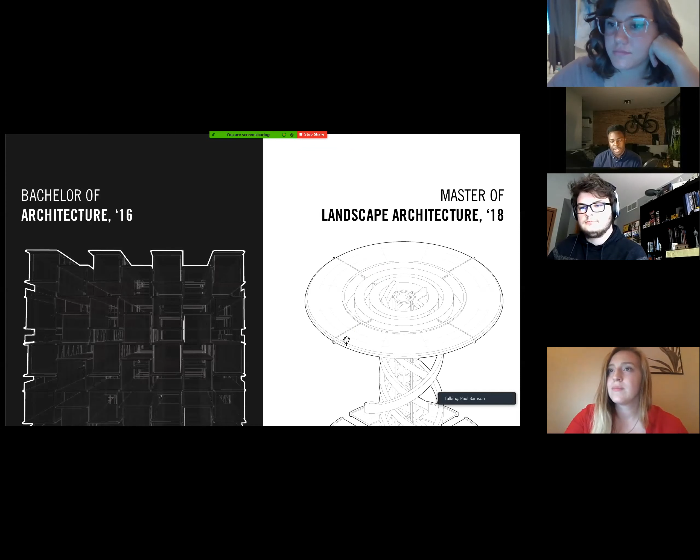I went to the University of Tennessee, where I got my Bachelor of Architecture and my Master's of Landscape Architecture. I really enjoyed the opportunity to go to UT because all three major design disciplines are in the same building: architecture, interior architecture, and landscape architecture. There's lots of cross-pollination in the studios, and that allowed me to branch out to look at landscape architecture.

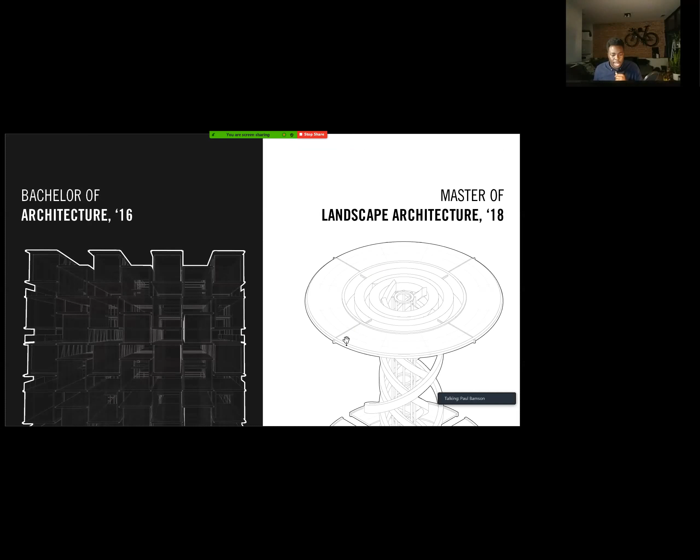I'll actually be showing some work in both of these fields. But back to who I am: Nigerians are very colorful people, both in the way we dress and in the way that we act. If you know any Nigerians, they're typically very flamboyant and loud people, but we're full of passion. One of my dreams is to go back to Nigeria in some way, form, or fashion and make an impact there.

I grew up here, and my first time back in Nigeria was actually in 2018, just before I started working at SOM. We traveled for a month, and I knew I had to go back to Nigeria before I started working, because it would be hard to take a month off to see the rest of my family after I had started working. So I decided not to immediately start working after graduation. I was exhausted after 7 straight years of architecture and design school, so I decided to take the summer off, and this was one of the best ways to spend that summer.

And it really gave me a lot of perspective as to what skills I should make sure that I have shored up now, so that if I ever do make the trip back to Nigeria, I'm aware of the issues and situations that plague that country or those communities, and I can make an impact there.

So if you are someone who is not native to the United States and you know the blights that the communities you're from face, you should be thinking about that and ways that you can improve their lives with the skills you're learning now. And that applies to those born in the States too, because the United States is not a monolith. There are many small communities that go through lots of challenges, so think about home a little bit as well.

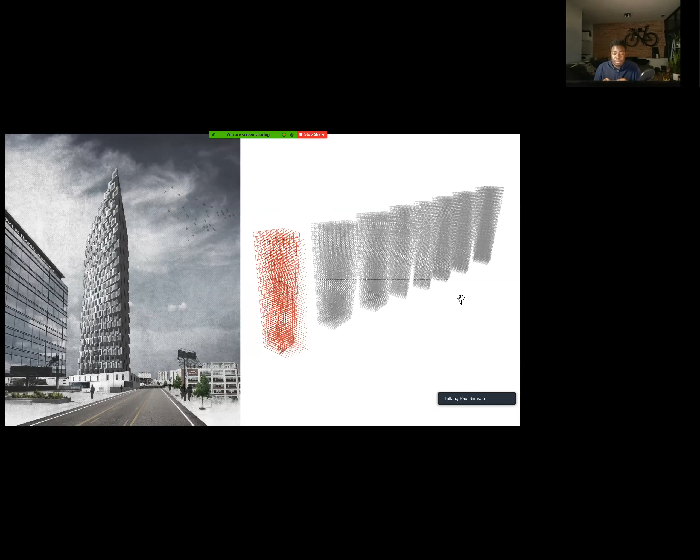And so as someone who is really passionate about skills, and as someone who is a minority wanting to give myself a leg up, some sort of advantage, or some way to stand out, scripting was one of the ways I did so.

So what you're looking at here is a residential tower, and each one of the residential pods is like 2 pods on the east and west end. I was playing with how they would slide forwards and backwards to provide maximum views for each person in the tower. So this was a fun script to work on.

This was actually kind of a passion project to get used to using Grasshopper, between my 4th and 5th year. So this wasn't even a school project. You're like an architecture nerd, or you're obsessed, when you do architecture projects that aren't studio based or school based at all. But I was able to include it in my portfolio, and it was a project that was often talked about in my interviews.

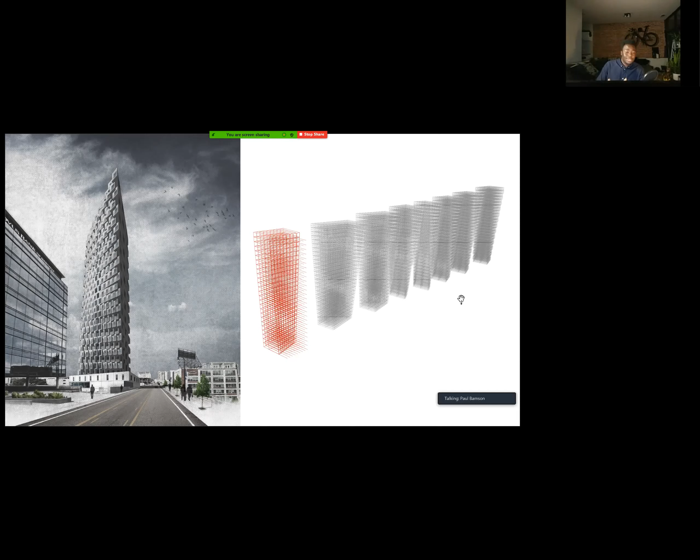So if you're like, my portfolio is a little light, I only have 3 projects in it, and I'd rather not revisit that second year project that I hated so much and pulled my hair out over, do a new one. Nothing is stopping you from doing a new project. If you need to boost your portfolio and you have a ton of skills now that you didn't have a month ago, or a year ago, or 2 years ago, do your own project. Nothing is holding you back from that.

At the University of Tennessee, we had several projects that were kind of like group competitions that started what was once the fall semester, but we moved it to the spring semester because oftentimes the first years had no architectural skills in the fall of their first year.

But as someone who's not part of that community, being in that space and thinking in that way was definitely really impactful, and had me get out of my own comfort zone. So I encourage you, get out of your comfort zone as often as possible, because as a designer, you are not designing for someone who's just like you. You're designing for many, many different types of people. So work to put yourself in that kind of mindset if you're not already in it.

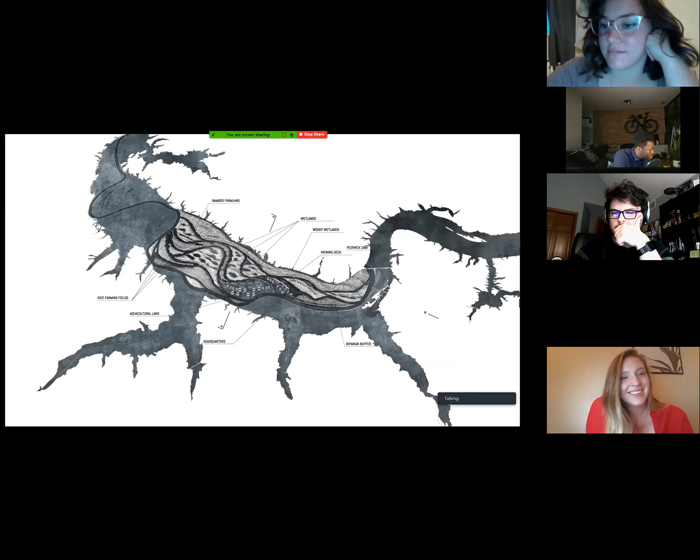Come on, you can do it, buddy. Okay, one sec. There we go. Ah, good, it's done.

Looking through my file structure here. I did a purge of my computer after graduating, so I could get rid of programs like AutoCAD and Revit, which are super heavy and I rarely use anyway. There we go, so there's the PDF. It's a big boy at 83 megs, lots of stuff. Okay, cool, now we don't have to wait.

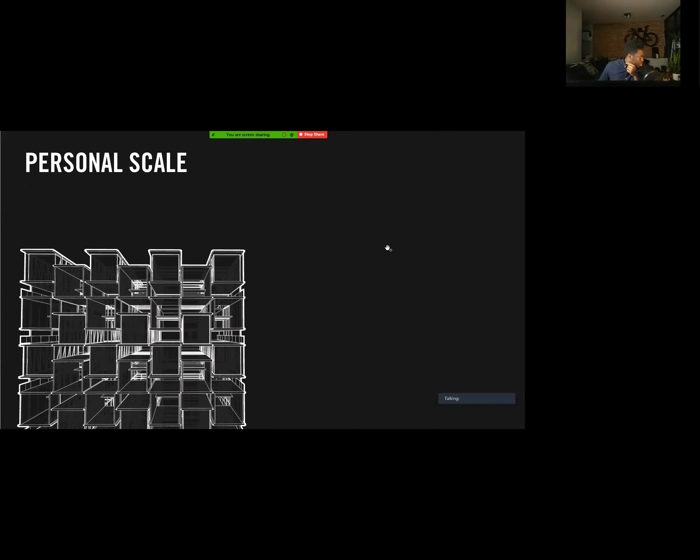Don't be like me and procrastinate till last minute, that's still a bad habit I'm trying to kick. Okay, alright, next. Yep, talked about me, talked about my family, my education.

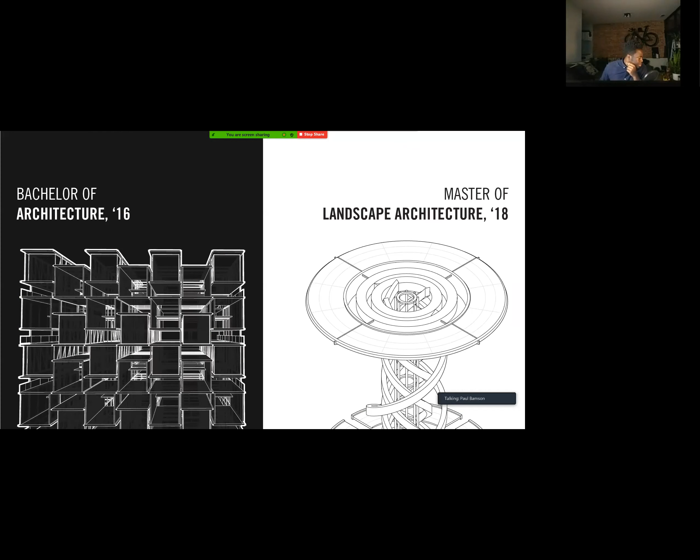So this project here, I called Curated Inundation. Naming projects is one of my favorite things to do, something I actually quite miss doing in the professional world. Inundation, for those unfamiliar with the term, means flooding, and I wanted to control the flooding of a landscape environment.

This location is in Savannah, Tennessee. That's farm country in Tennessee, and they mainly grow wheat and corn, which if they flood, they die.

TVA manages and monitors the water level all throughout the Tennessee River. When there's a large storm event, they can release water strategically to prevent flooding in the cities. Savannah, Tennessee is one of the northwesternmost areas, which is actually the lowest end. So they would actually prefer to flood the farmland if there was a storm event requiring more water release, versus flooding the city of Chattanooga, for example, which tends to happen quite a bit.

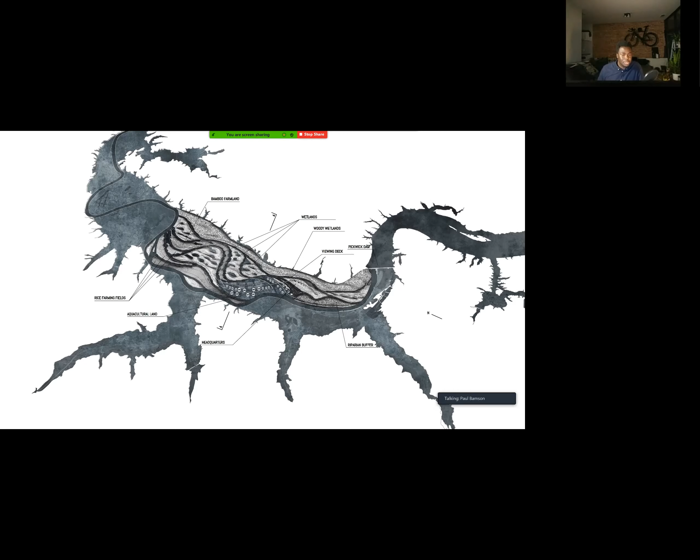Next, I'm going to talk quickly about this because I want to get to the professional stuff. But this is another school project we did on the Charles River in Boston, Massachusetts. We got to go there. Boston's a super cool city. Some of the most prestigious colleges are there, of course, in Cambridge, MIT, Harvard, and a couple others.

The main project here was studying the site. Actually, the project title was called Parasite, which I love so much, because we were designing sites that had unique symbiotic relationships with the cities they existed in. So I specifically looked at the Charles River because I'm obsessed with water and the use of water, thinking about how we could take this system that is highly controlled in the Boston area and upstream.

Which again is weird because it's technically south but upstream, since it flows north into the bay. All of this is farmland. So I did some mapping exercises, mapping the flow of water in each area, as well as the agricultural runoff, like nitrogen and phosphorus, which are fertilizer for a lot of the crops that we need to grow enough food, because we have 350 million people to feed in this country, which is a lot.

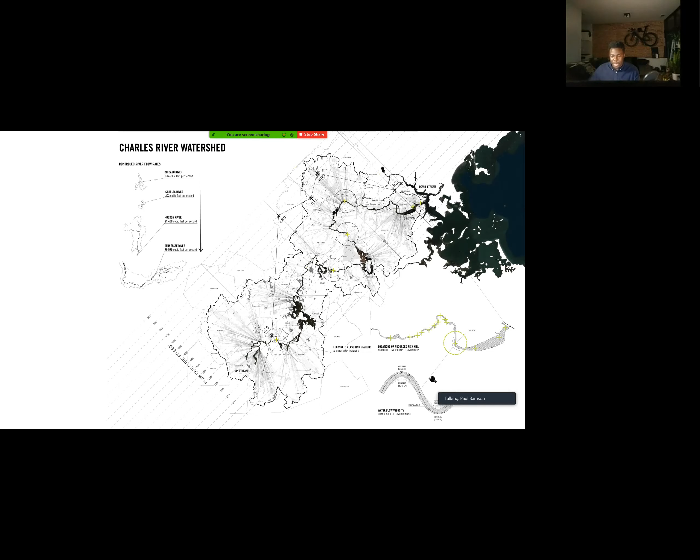So if you look at this diagram here, water will flow faster on the cut bank and slower on the point bar. The point bar, which is the curve area, will build up material. So based on the curve of a river, it'll flow at different rates, which is really cool.

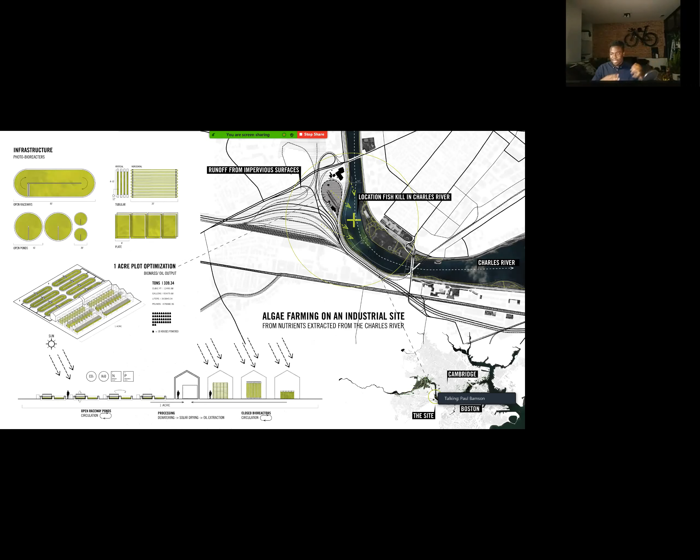So I looked at what does algae need to grow, and how is it currently grown. Can we create factories where we're extracting the excess fertilizer from the water and then growing it intentionally off-site? That was kind of the idea I was thinking about. And I had to go into systems thinking, looking at all the things that algae need.

So sunlight, phosphorus, nitrogen, CO2. And thinking about these systems was really hard, so you have to diagram all of that to keep it in your head. But you've got inputs, processes, and outputs that you can then use for other things.

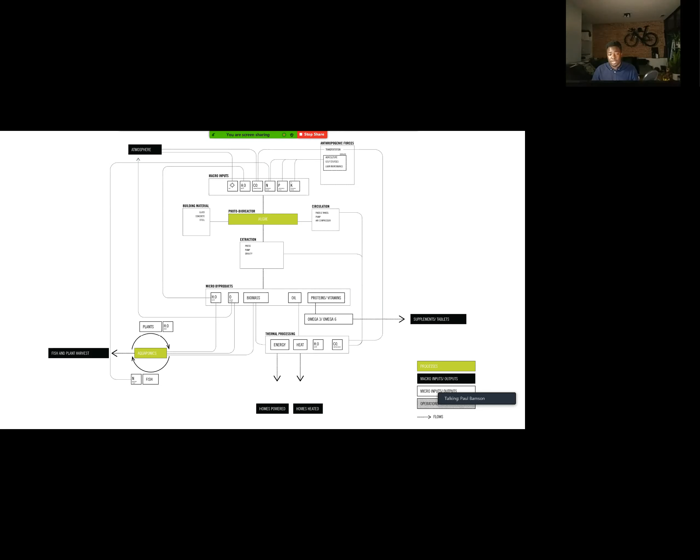So if we're growing this algae off-site, using nutrients we're pulling out of the river to prevent algal blooms, we can then grow algae intentionally and have it go towards energy as biomass, or to create medicine, or as fertilizer or food for fish and plants, really creating an economy around these processes that prevents one problem but creates a ton of other benefits.

And the solution I came up with was a floating wetland created by these interlocking units that would have the wetland in the center.

The wetlands would then have roots grow into the water, which would create habitat for the fish, create areas where they can eat, dissolved oxygen, so it'll make the rivers cleaner. So all of these environmental benefits, where plants are not just there to look pretty, but to actually perform a specific task that's really important for the environment.

Creating habitat for birds, places for them to land, because Boston is highly urbanized and its green-to-urban ratio is not good. So how can we create increased green space in the city as well, along the river?

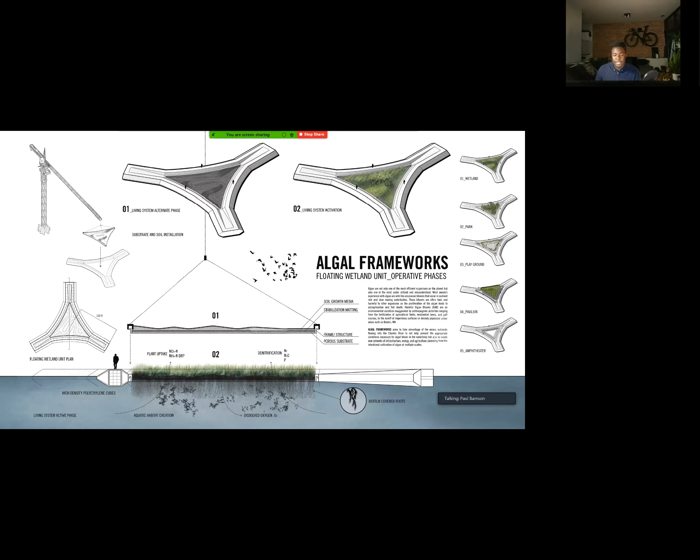So this is what it would potentially look like when they start getting connected. This is one of my favorite projects—it was actually my last semester before graduation, and I was really like, I'm just going to go all out and design something wild.

So, creating farms that are extracting water. We then take the wetlands, extract the nutrients from them, and use them in the intentional farming. I was thinking about energy generation, I was thinking about everything. It was a fun project.

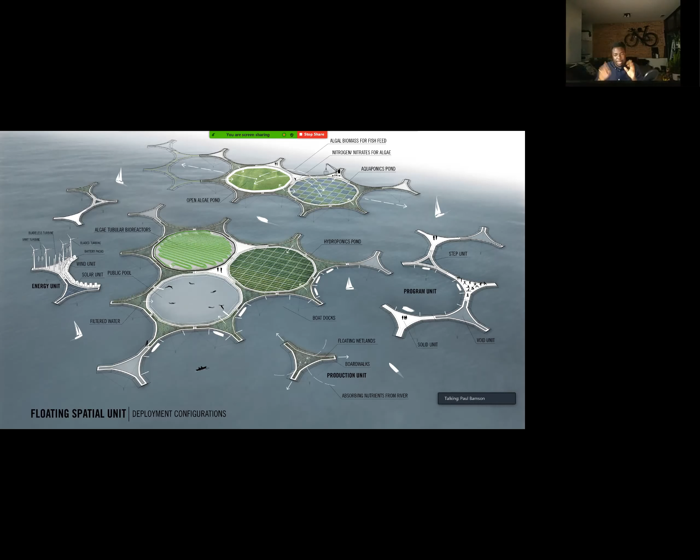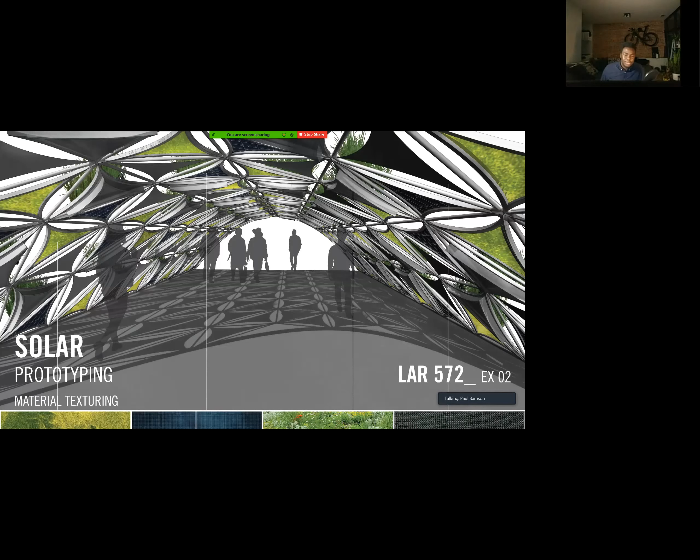And then I was also thinking, what about a small scale? Like if you take this and scale it down to the size of a park. So one of our other class projects was creating some sort of landscape canopy, and I thought I'd want to create one that's solar based—so you'd have solar panels, algae, plants, air cleaning fabric that when exposed to the sun starts collecting pollutants.

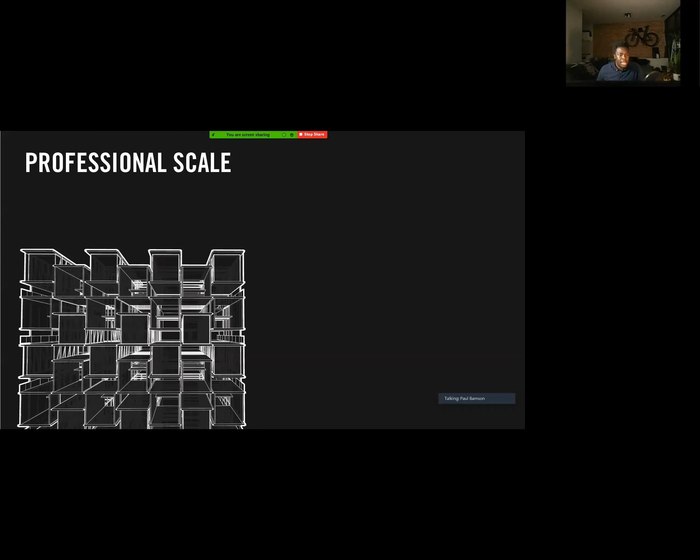The first project I'll talk about is how I tried to evolve myself and my skill set at the firm that I now work at. At SOM, it's a place where they want you to explore what you're passionate about, because they know you'll work better that way.

Like I mentioned earlier, I love scripting, I love algorithms, and I would see the way we would do certain things and think, why are we doing it this way? Why are we still using AutoCAD? I would ask these questions, and when I was asked to do a task, I'd think, I'm not doing it that way, and I would build my own script to do it faster.

One of the biggest time impacts or the biggest bottleneck is the modeling framework, or the models we use in our urban environments. When you're designing a city or a development, changes happen every day. When you have to remodel all the streets, remodel the parcels, remodel all the massing because a design director or partner said we should probably remove that road, it not only changes the road, it also changes the parcel, and then it changes the massing that's on it.

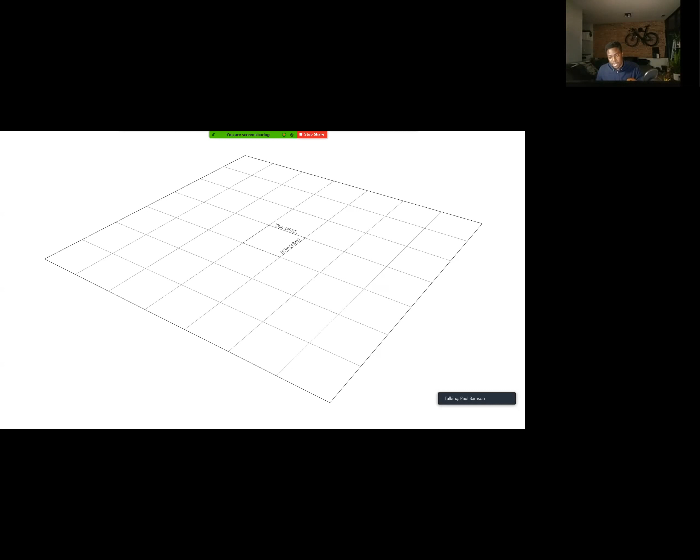So this was how I addressed it. I built a script that takes the road center lines and offsets them all. I don't have that included here, but it takes those center lines and offsets them.

You can then trim them or modify them however you like. And then the script will automatically create the offsets and clean up the interior portions. So if you've got two lines intersecting, it'll find the gap in between them, and then it creates your parcels. And then as a designer, you go in and specify all of the types of parcels.

So I want landscape in this parcel. I want buildings in this parcel. And the buildings I want here, I want mid-rise. I want residential here. I want this section that I've cut out to be water.

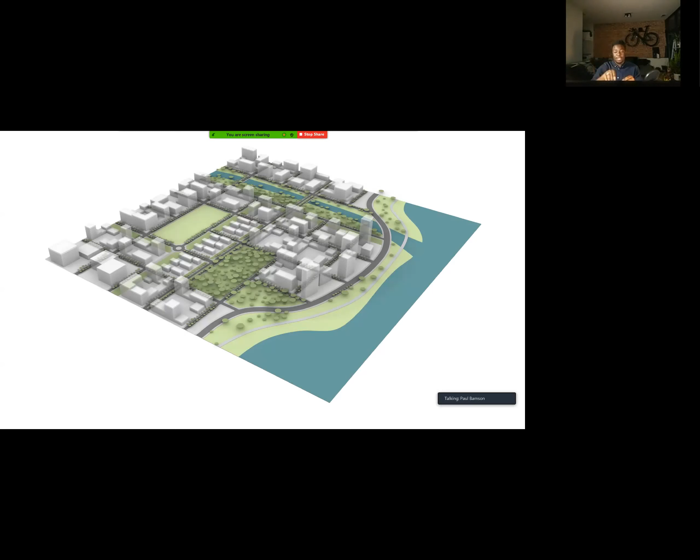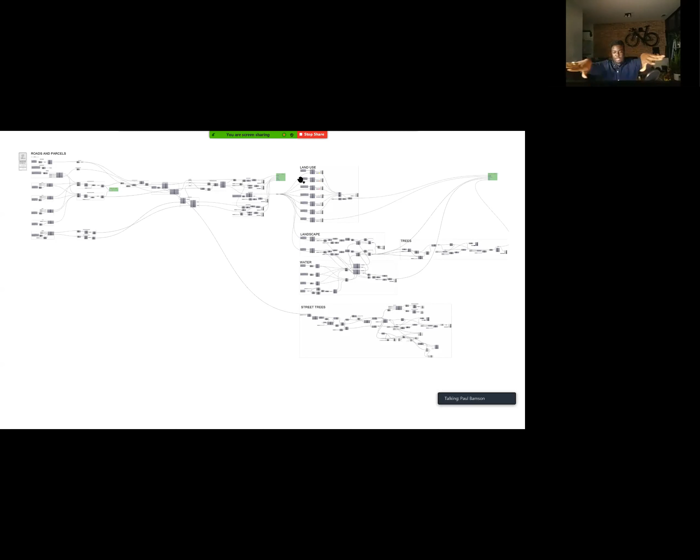And then once you've specified all of those - by specifying, I mean placing a point in a layer called park or parcel inside the area - it would kick it, this is so fun to build, and it would do all of the splitting and creating the intersections and framework. And then you would specify the land use of each one: yellow for residential, orange for mixed use, red for commercial, green for park. It would then split out those parcels into their respective land use and generate the geometry that way.

So now, instead of saying let's get rid of that road and then having to remodel all of the adjacent parcels, we can just delete the curve, and then Grasshopper would generate the geometry again. So that was a really fun project to work on.

And then it's thinking about how do we make it do more. So can we have it analyze traffic patterns, so we can have a workflow where we're getting real-time data from it? This was a very early beta version of the project, and we're currently developing it further because we'd like it to be able to be used firm-wide, not just in the Chicago office - how can this really be something that can be deployed? So that's in the works now.

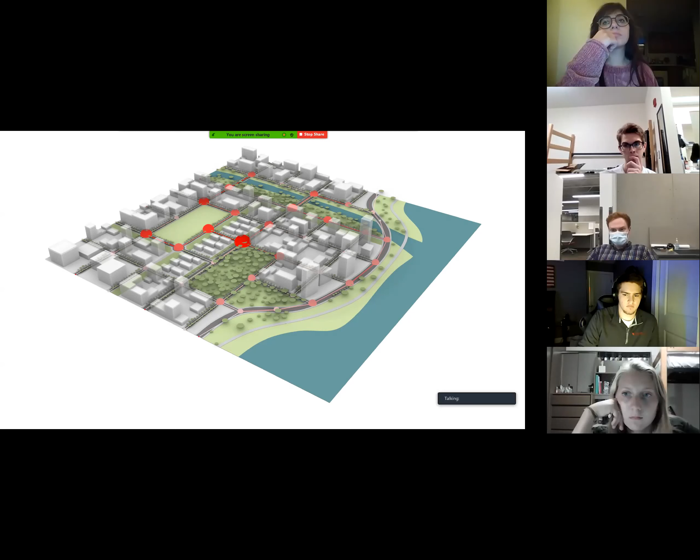But your skill set might not be scripting, but you do have certain passions that for some reason every project you do, you address this specific part. So find ways to strengthen that and become the best at that, because you can make a huge impact wherever you end up with that skill set. So always be thinking about that - what is the thing that I'm always obsessed about and somehow finds its way into all of my projects?

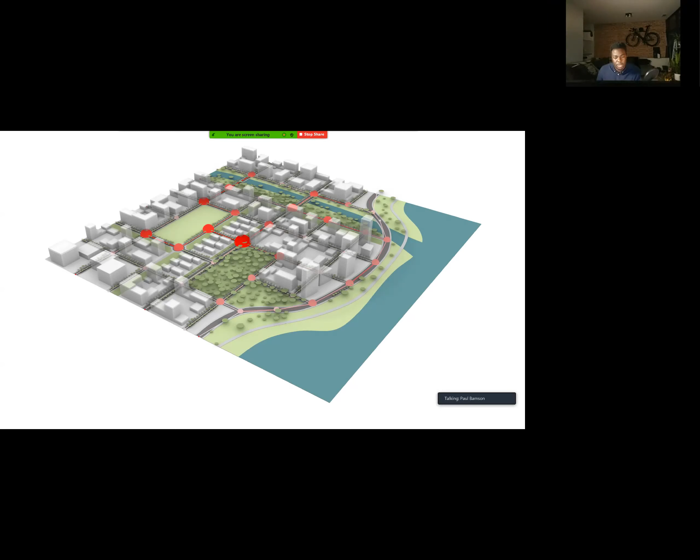For me, it was how do I do this faster, and how do I make it do more than just making an awesome model and then doing drawings? How can it be alive and change? That was always my thought process when I was doing projects, and now it's part of the work that I do every day.

Okay, so let's talk about a project. This is the Atlanta University Center, a consortium of some pretty famous universities in Atlanta - Morehouse, Spelman, Clark Atlanta University. And what I didn't know at the time was that those universities were like neighbors.

And by neighbors, I mean they might as well have been considered the same campus. I didn't know that. So when we got invited to do this master plan for the Atlanta University Center, my colleague David Scully, who is 10 years in the industry now, he's kind of like my big brother. He's African-American, grew up in Chicago.

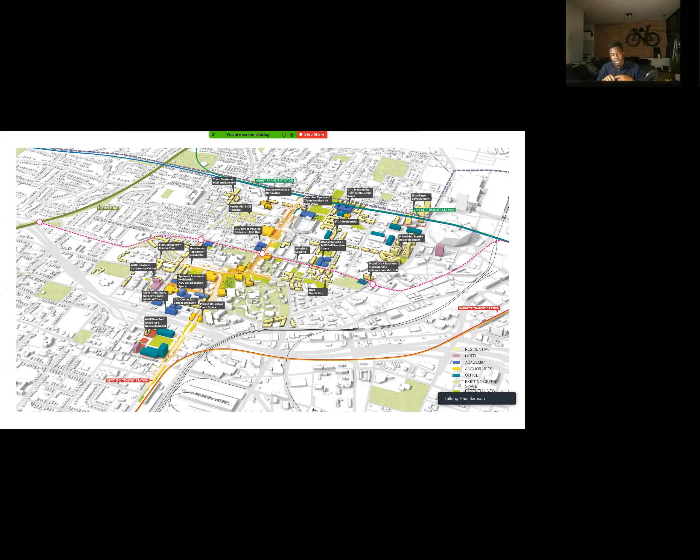One of our ideas was, how do we connect Spelman, which is here, and Morehouse with some sort of amenity that would bring them closer together? So we proposed moving the parking somewhere else, potentially underground, and converting that center space into a quad that would represent all of the different campuses that exist here.

So I created paths — this part I had the most direct influence on, which was a lot of fun. I designed each path to point towards the center of a specific campus, connecting Morehouse, Spelman, and Clark Atlanta, while bringing more greenery into the environment and creating a safe place for students to gather for events, concerts, flea markets, protests, or any number of outdoor events.

So we were looking at ways to essentially say, hey guys, this parking garage isn't doing you much good.

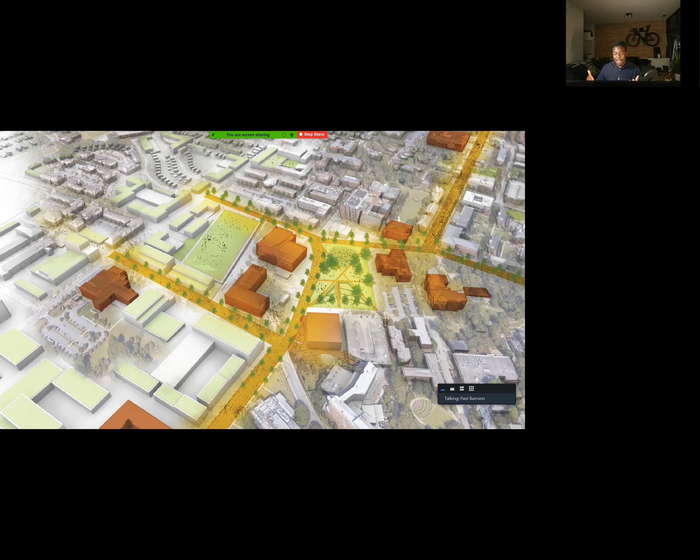So we wanted to create a public quad that people can use for hanging out, talking. This is a rendering of the quad, for studying, meeting up with friends, and also a quad that's public, so other people in the community can come and use it as well. It's not just specifically a university thing. We wanted to take something that was very much students only.

Whenever you want to look hyper official, just have a drawing board with you, or some sort of rolled up thing. You'll always look hyper official. You'll get in anywhere. Anyway, I'm just joking.

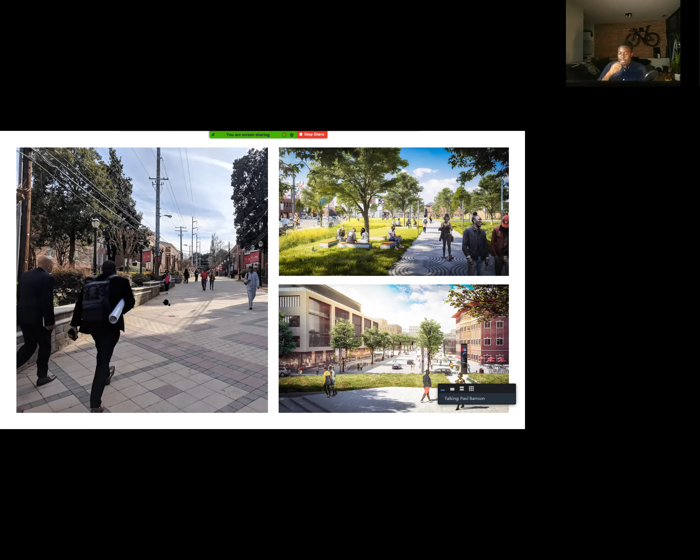So anyway, we wanted to create those spaces and have the architecture serve multiple purposes, as well as creating great public spaces. We wanted to improve the street life quite a bit. A lot of the streets are underdeveloped, and a lot of the priority and funding goes into preserving the historic architecture, but not a lot of that money is used towards making great streets and public spaces, because most everyone drives everywhere, and not enough people walk around, because it's typically either not safe or it takes too long to get where you need to go.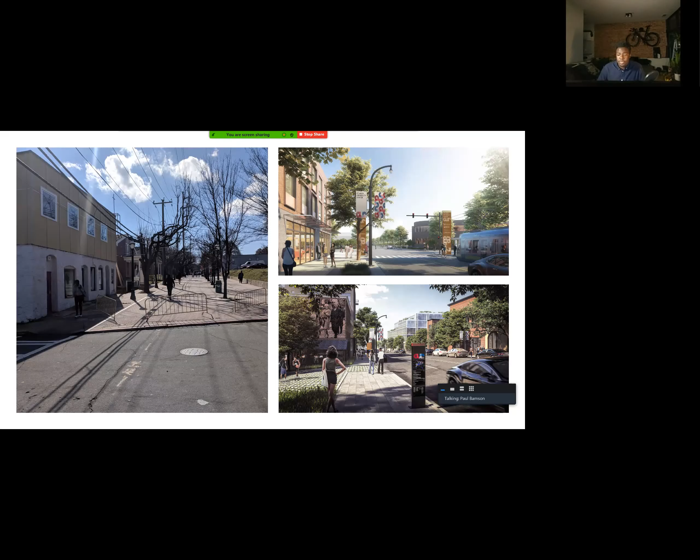So those are things that we wanted to improve with the project. We also wanted to improve the gateways and the faces of each of these campuses. What do people see when they come? Because right now they see a gate that says, you cannot pass, right? You shall not pass, because you're not a student.

I'm so glad some of you caught that. Thank you for being nerdy like me.

So we wanted to create brand new promenades and entrances for each of these universities at the different corners. This would be Clark Atlanta's entrance to the north, a great bridge that goes over a not so great highway, or Morehouse to the south, which actually will connect to more development that's happening on the south side of Atlanta, which is great, and having it be more inviting to each visitor to the site location.

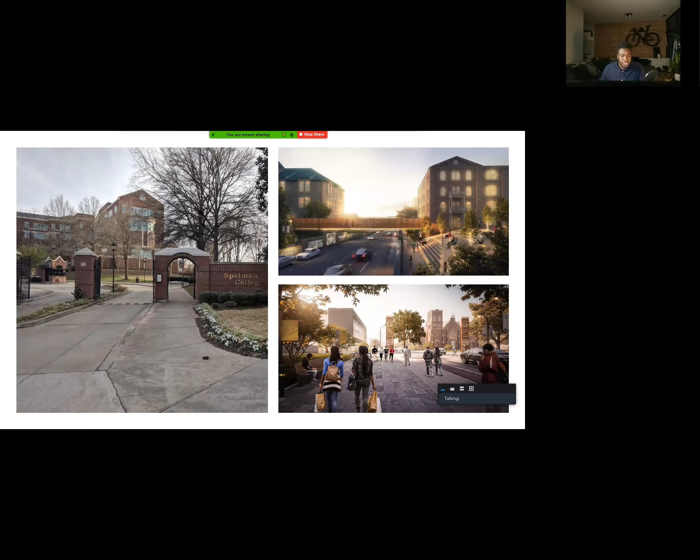Okay, now let's talk about some industry scale stuff that I'm working on. This will be mainly talking about NOMA, because I'm highly involved with NOMA. So I'm going to show you some stuff that we did at the last conference in Brooklyn, New York, that happened last year.

This year, we were supposed to meet in Oakland, California, and then COVID ruined those plans. So I was like, oh no, I wanted to go to Oakland so bad, because I'd never been to California, and I saw Oakland in Black Panther, and I was like, yes, I have to go there and check it out. I will have to put that on hold for now.

But anyway, while we were in New York last year, I got a chance to present at the conference. So I did one of my 'You're Doing It Wrong' workshops on how to use Grasshopper to speed up certain parts of your workflow.

So I literally designed a tower from scratch using only Grasshopper. The only input in Rhino was two curves, one being the outer boundary, the footprint of the building, and the other being the core. And then I generated the whole tower.

And the idea was to show how these tools are out there, and most professionals are stuck in a trap of only using the tools they knew how to use when they graduated from college. And so each year as new graduates graduate, you don't have enough time to learn new skills. That's a huge problem in the profession, one that I'm trying to tackle at an industry scale.

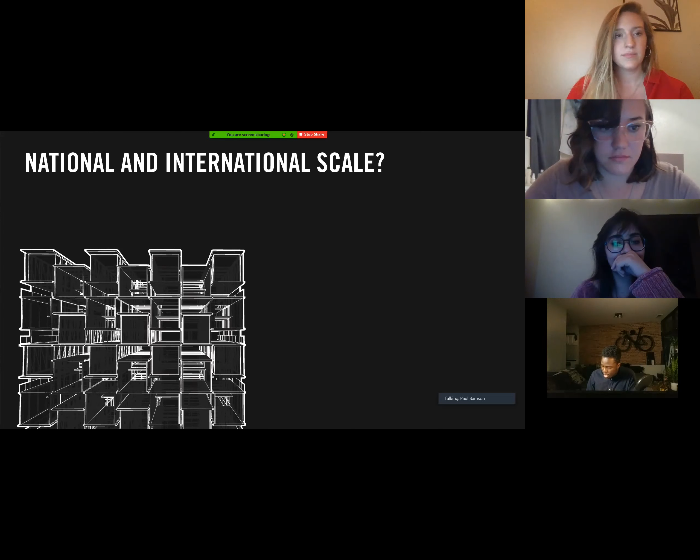This project here was inspired by their project. I used their project called the Vancouver House in Vancouver. Familiar with that project? That's my favorite BIG project. But the one that you're looking at here was kind of an early experiment with that.

But it really inspired the presentation.

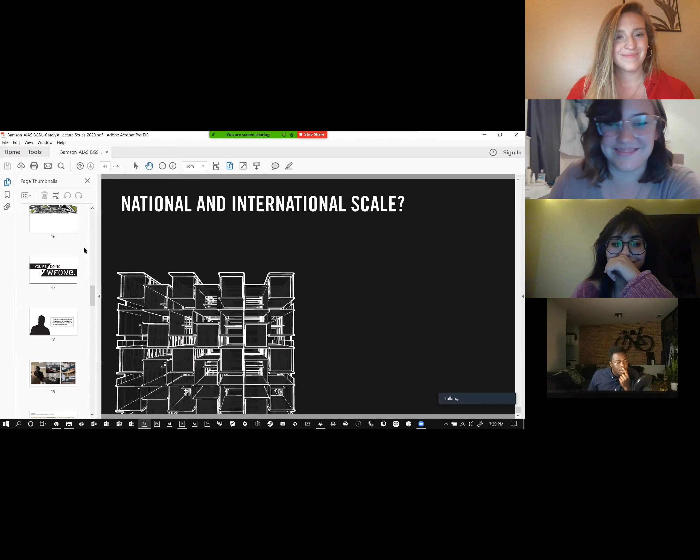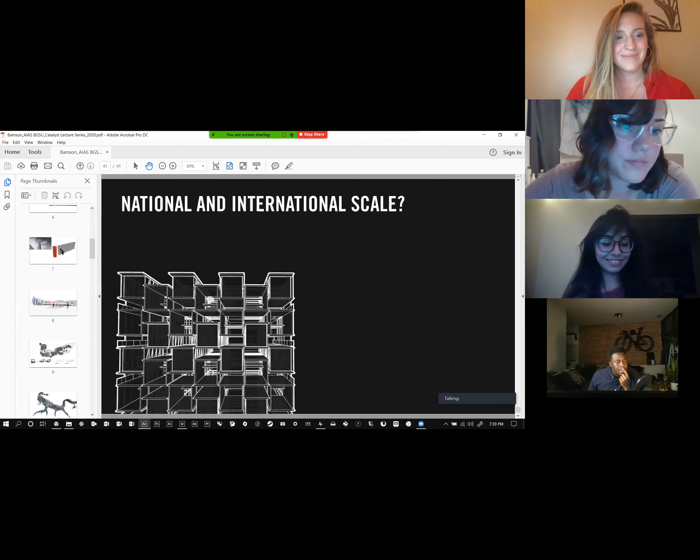Yeah, keep going. This one. So if you look up the Vancouver House and you look at this, they're like almost identical. They're not identical, but they're pretty close.

Their work always, the reason why I love their work so much, is because they try their best to solve the specific problems of a site through the form of a building. And that's what drives much of the criticism of their firm - that they just do the same thing over and over again, taking a bunch of boxes that are stacked and then rotating them. It's like, yeah, but it solved the problem of the site. So it works. That's kind of like my main rebuttal.

But anyway, I love that firm. That firm is really awesome. Another firm that does a lot of really amazing work is Mass Design Group in Boston. Are you guys familiar? If you're not, you should be.

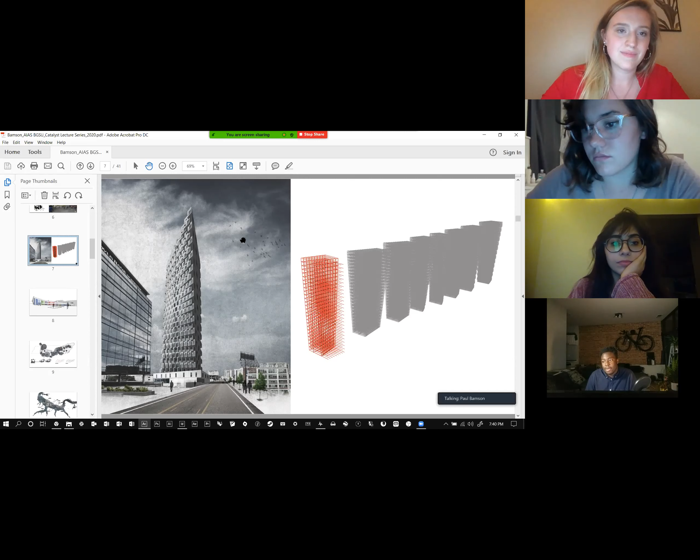They're probably the leading firm in equitable architecture, because they do a lot of great work, not only in the United States, but in Africa. So they were actually on my list of firms to apply to. But I just liked Chicago more than Boston, so I made my choice based on city.

I think city was a way more important decision for me than the firm, to be honest, when I graduated, because I knew if I didn't like the work I was doing, I was just going to pick a different firm. But anyway, side note, their work is amazing. So, Mass Design Group.

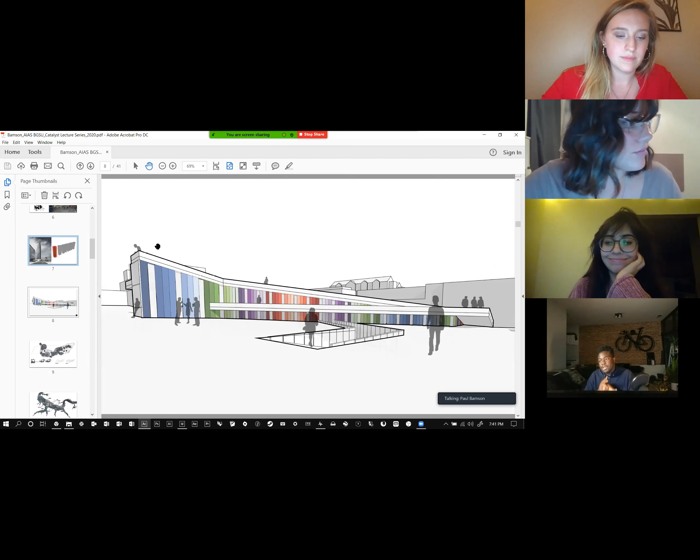Any other firms? I can recommend some landscape firms that you should look at if that got your blood pumping - you're like, oh, that looks really cool.

So Nelson Byrd Woltz, they're an epic firm in Charlottesville. I actually got to intern there, one of my winter breaks.

So I even use my winter breaks for internships, guys. That 2-3 week period between Christmas and New Year's is a golden time to get an internship, because then you can still put that firm on your resume and you have a connection with another firm. So don't waste your winter breaks either.

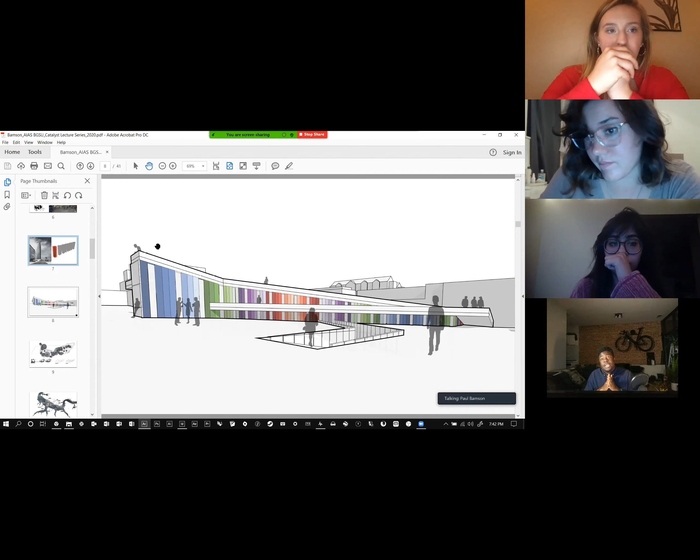And so they're a great firm. Tom Leader Studio, another great landscape firm. Let's see, we work with a lot of these firms actually, because SOM is not a landscape firm. And I debated whether, because originally I wanted to join a firm that did both architecture and landscape.

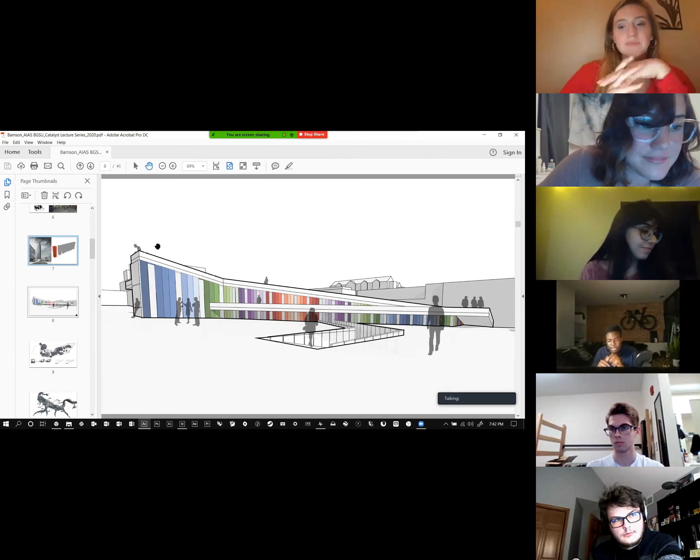Weiss Manfredi does a lot of really cool work. Olson Kundig in Seattle does really cool work as well. Any other questions? Let me make sure there isn't anything in the chat I'm missing.

Yeah, I threw one in the chat, I don't know if you saw it. I was asking, how has COVID impacted your firm's work? And have you had concerns about the longevity of your position as kind of a newish hire in the firm

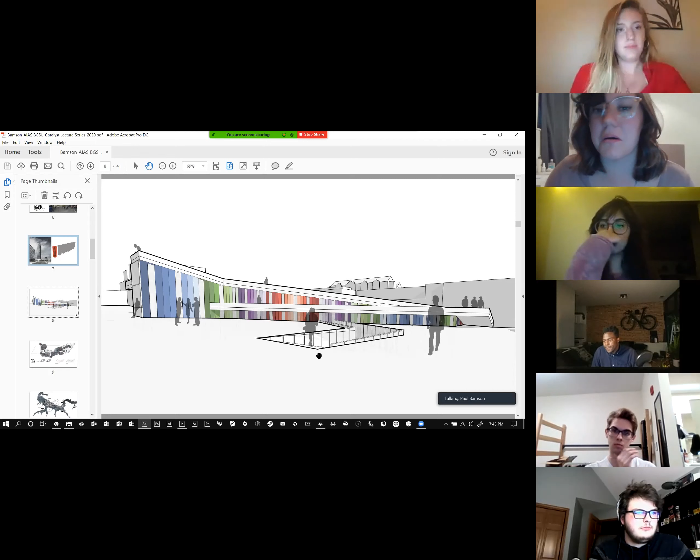Good question. So I'm in my office now, it's also my home. I've been working from home since March, and what's also interesting is that we had just finished our new office renovation. The week we were to move into the new office, COVID hit and we went home. So I haven't seen the new office yet.

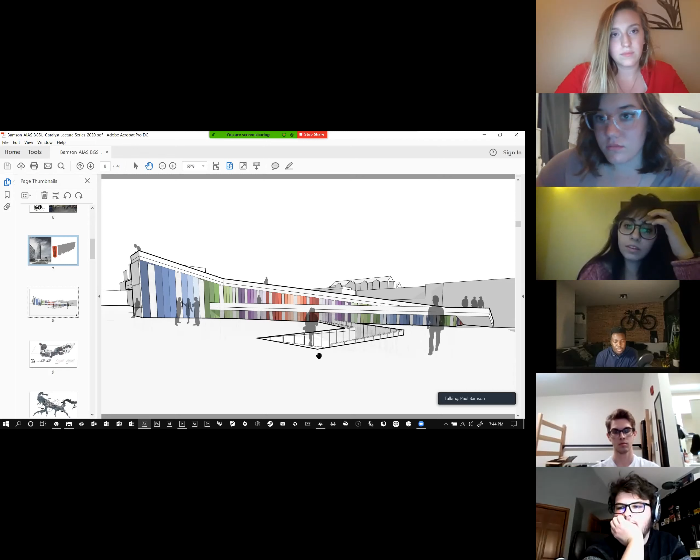I mean, I went there once to pick up some equipment, but that kind of put a damper on our plans. COVID hit hard. Many projects were put on hold or stopped, and there were layoffs in the firm. I was lucky enough to keep my job.

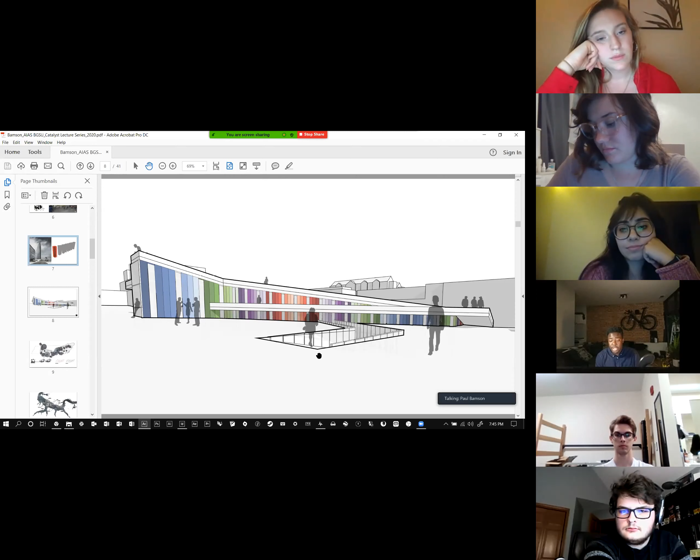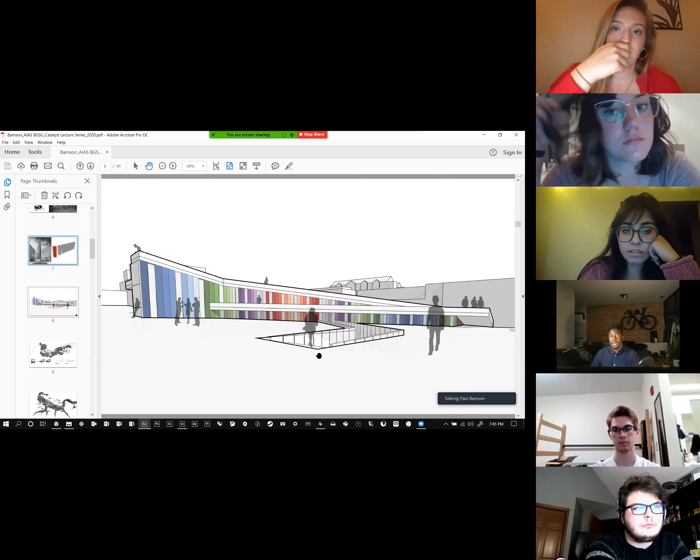More people are going to want to remain working from home because it's actually really nice and convenient. It just means you have to communicate a lot more. You have to be in more meetings, and you have to be more reliable almost because you're apart, or you have to prove that you're still being as productive.

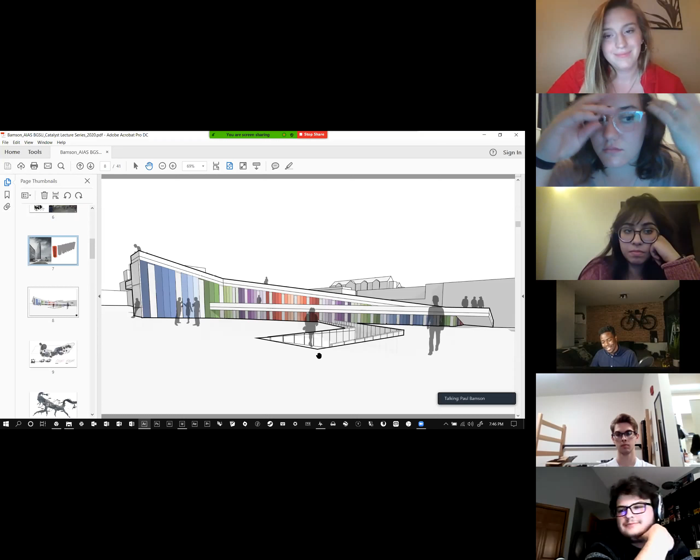That's been a downside of working from home that I have not enjoyed. I do not like meetings. If we can figure out the issue with a couple emails, great. I'm not saying meetings are bad, obviously meetings are great, but when you have like four a day, it sucks, and you're not nearly as productive. So trying to find the balance between meetings and working has been an interesting adjustment for sure.

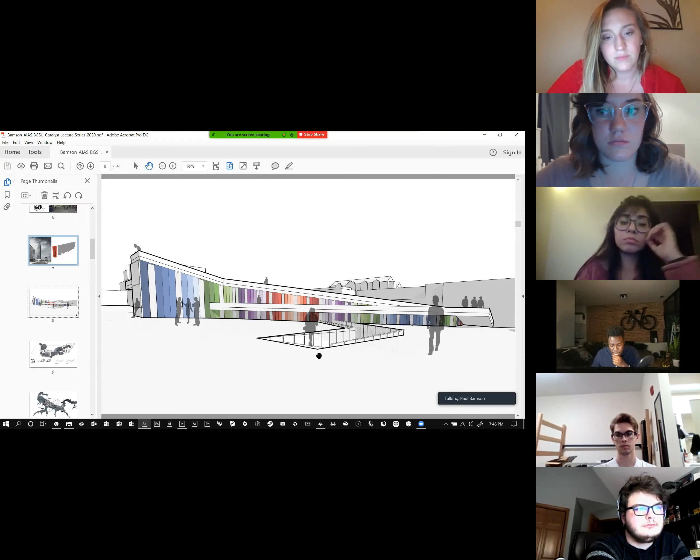Any other questions that you were asking about? Like I said, I was lucky enough not to get laid off or even furloughed. One of the reasons, I think, was because I made sure that I was indispensable to the best of my ability. This is all work that happened even before I got to SOM.

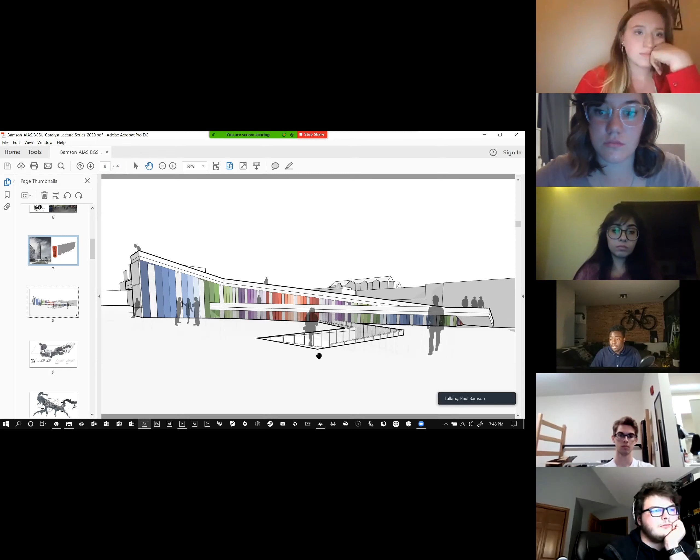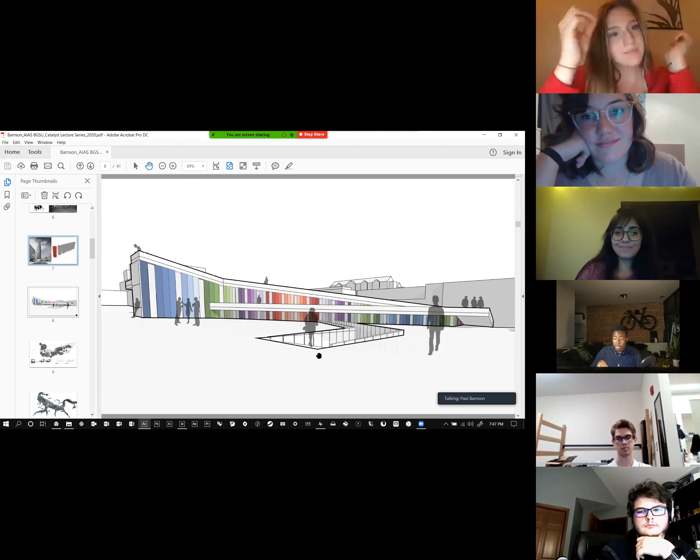I spent many, many hours beefing up my skill set. I've watched thousands of hours of tutorials on everything, and now I'm able to do them. So if you want to make sure that you're someone who is unfireable, make yourself indispensable. I'm not saying everyone go learn Grasshopper now, but whatever you do, make sure it is extremely good and to the best of your ability.

Make sure that it's something that your firm is currently missing or is something they want to improve on. So it's like, we can't fire Haley, she's this person, she's extremely valuable with this, so we can't fire her. You want to be that person as quickly as possible. So I worked over the past two years to do that.

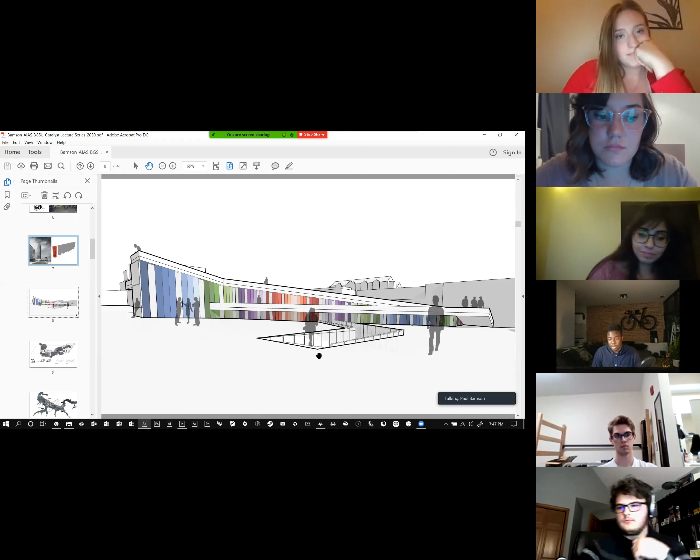And potential plays a lot of weight in that game as well, because they want to see what you'll become as well, just as much as what you can provide now. Firms are really good at saying, okay, this person might be a really amazing project manager or a really amazing future partner in 10 years, or this person is amazing with our clients. All that stuff matters and is part of your skill set.

So spend time when you're bored, instead of playing Fortnite or watching another movie on Netflix, watch a tutorial for an hour, beef up your skill set in Revit or Rhino or Grasshopper, and it'll pay off way down the road. So always think of that time as an investment, not as a chore, and it'll pay off.

You kind of hinted at it, but I was just wondering, what's your 5-year plan from now? Because you have your 2 years there already. Where do you see yourself or aim to be in 5 years with your career?

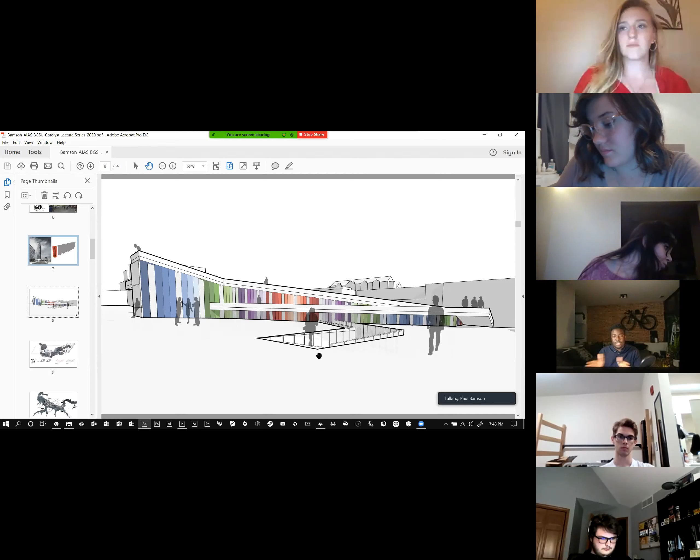Good question. So I'm in a weird position because I'm not earning hours to either licensure path. I could get licensed as an architect, or I can get licensed as a landscape architect. I can even get licensed as an urban designer.

I would have to actually change the course of my career to get licensed in either of those fields, except for urban design, which I can keep going with. It's not very hard at all, just studying for a couple exams and taking them. But if I wanted to get licensed in architecture, I can take the exams now, and I'm thinking about making 2021 my exam year. It was supposed to be 2020, but every 2020 plan in existence got derailed.

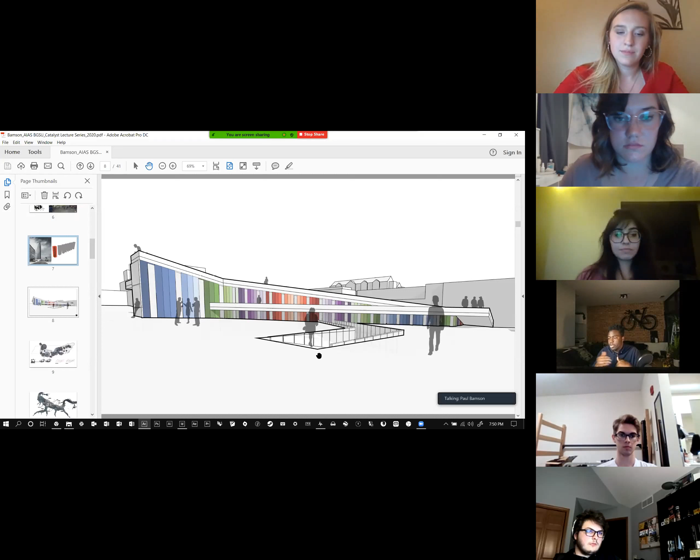My 5-year career plan is, I think I can have my license, at least in architecture, by the end of 5 years from now, for sure, easy. That would mean at SOM, I'd probably switch to an architecture studio for a couple months to gain hours in various areas, and of course during that time, taking the 6 exams. But I definitely want to be a licensed professional within the next 5 years.

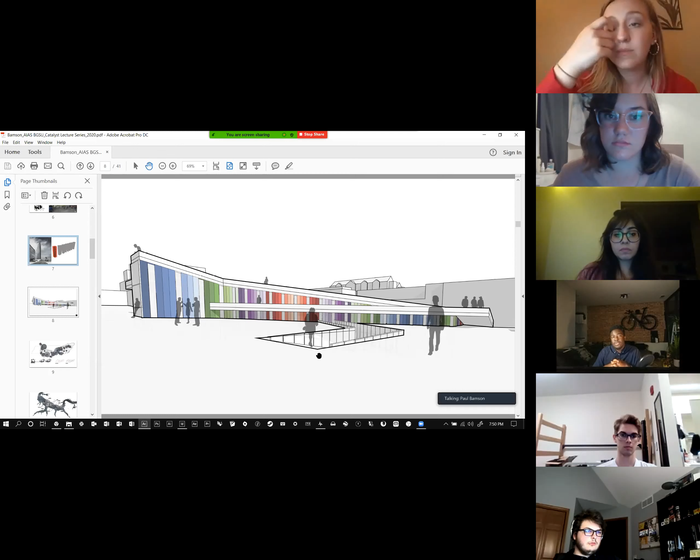That's number one. Number two is to solidify my value in the firm in some way. Being a specialist isn't looked down upon, but it's not usually the path they prefer you to take. They prefer you to be more of a generalist. But I personally like to hyper focus on specific things.

Because I enjoy doing those things the most, but that doesn't mean I don't like other aspects of design. I want to be someone who can make a really big impact in the firm and be a leader in a specific aspect that might not necessarily be management, because management looks really awful. I've seen the spreadsheets they have to do, planning weeks ahead. I wouldn't want to be a project manager at all. I'd want to remain technical.

Each firm does it differently, but you've got career paths and opportunities, and mine will most likely lean more on the technical side than on the management side, or even on the design side, actually. I'm more interested in how I can make design better than necessarily designing myself.

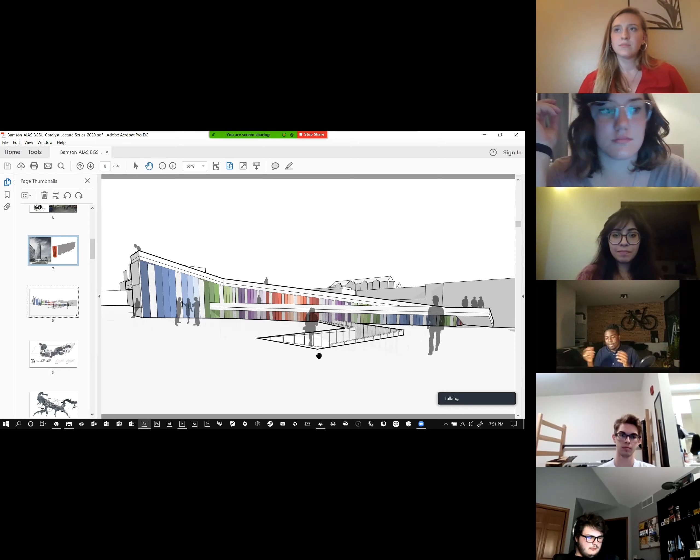But that's just me. In 5 years, at least, I should be licensed in something, which will then mean I make more money, which is awesome, but also be able to make more of an impact and have more freedom to do other things, because licensure provides you with that flexibility. So that's kind of my thinking. It's vague, but it's always changing. I think about it differently now than when I started.

It has evolved over time, and your 5-year plan should evolve. If it doesn't evolve, then either you didn't think broadly enough, or you shot for the moon and ended up on the moon, but you should have been shooting for the stars so you can end up on Mars. I don't mean to rhyme, but that happened. That's kind of how I'm thinking, and it's always changing. Each year it's different.

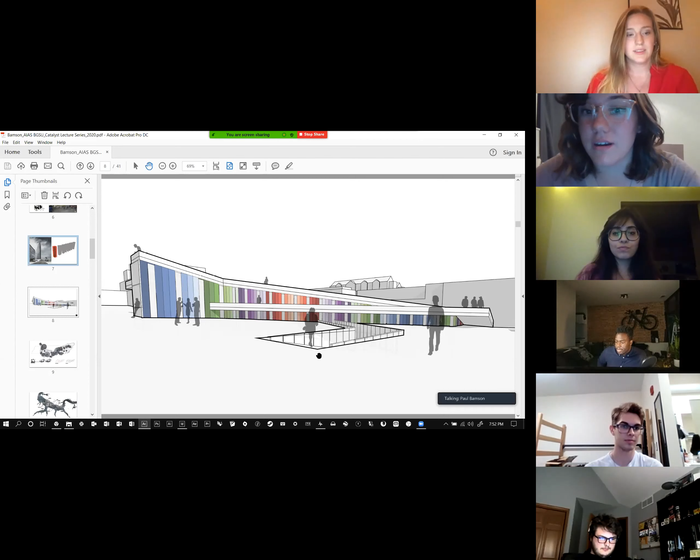So real quick, show of voices. What years are represented here? What years in school are you guys? Just say a number. Third. First year. Okay, so I heard a majority of 3rd and 4th years. That's kind of scary, this is a weird time to graduate.

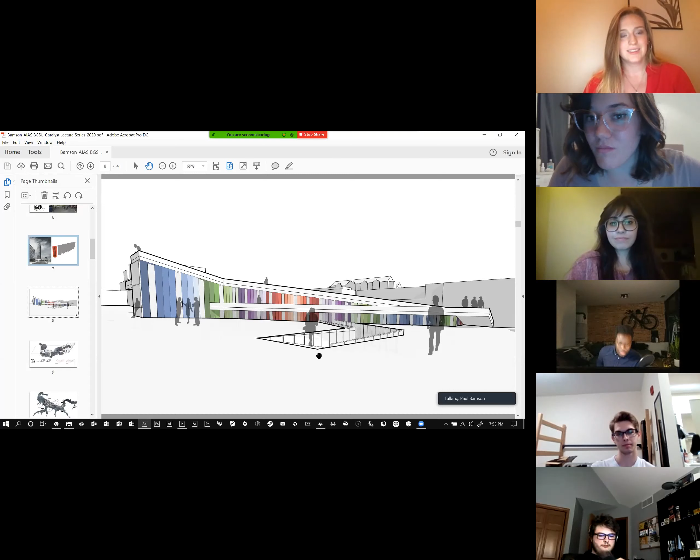Yeah, this is a very strange time. I'm hoping things change over the next year. So what I would be doing if I were you at this very moment is, of course, obviously skills, portfolio. Start on your portfolio now and spend several months working on it to make it super sharp. Revisit old drawings from your first, second, and third year projects you think are actually good enough to still include.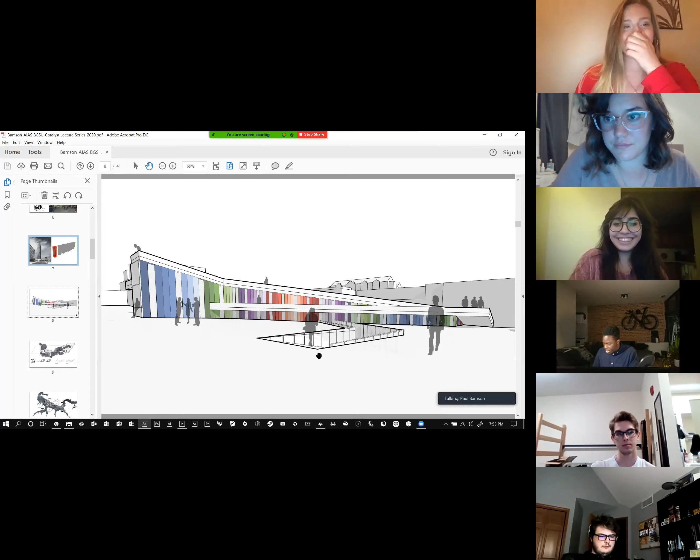Like, I'll actually show an example of what I'm talking about. Real fast, I'm going to go to my Issuu. I used to pronounce this wrong, by the way — I thought since it has 2 U's, it must be like 'issue' or something. But then someone told me, no dude, it's just 'Issuu.' And I was like, no way. That was really disappointing.

Okay, so here's an example of a drawing that I revisited from one portfolio to another. I was very prolific in my portfolio usage and creation. I used them to get my 5 internships, I think. Yeah, I did 5 internships before I graduated, which is a lot, but I made sure that I had the most experience possible. So if you're in your 2nd, 3rd, or even 4th year, fight for internships. This winter break, you should be reaching out to firms now to see if there's any possibility of you getting some time there, which will help you once you graduate.

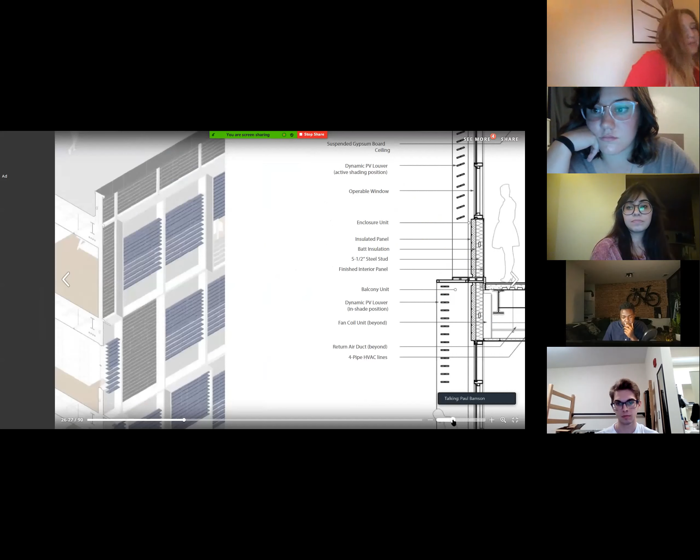But an example of a drawing that I revisited is this axon. Let's see. Take a look at this guy. This was directly after presentation, so we didn't have a lot of time to spend on our drawings. It's washed out, it's faded, line work's not strong. So this is a drawing right after we were done. I included it in my portfolio because it's not a bad drawing, but it could definitely be improved.

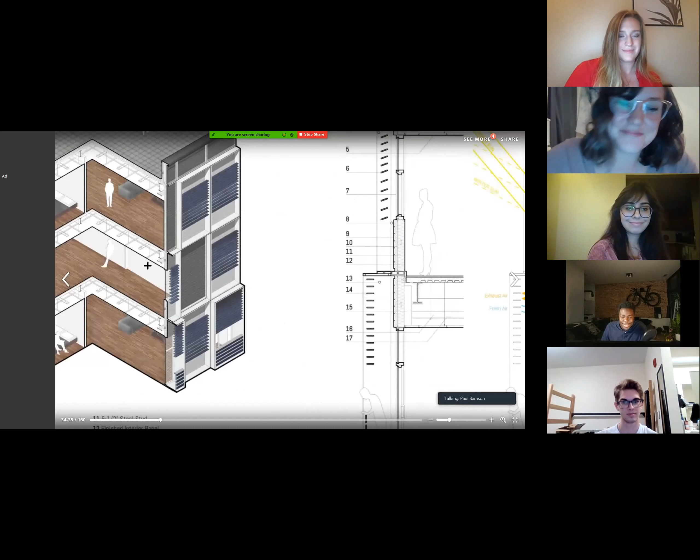So when I did my most recent portfolio, I went back and spent like a week on that drawing alone to really improve it, and I think it made a huge difference. So revisit your old stuff, because you're better now than you were when you first made that drawing. Believe it or not, you have way more skills. So revisit old drawings, spend time to make them better. So much more color and texture, shadows are better, the line work smacks. I didn't fill out the whole page because I wanted it to fit a little bit better. So anyway, revisit your old stuff.

So yeah, skills, portfolio, reach out to firms now for winter break and for next summer to see what their opportunities are. And apply to as many firms as possible. If you're applying to 5, that's not enough. You should be applying to like 15, 20. And think broad and think countrywide, don't just think in your city. Be available to move for a couple weeks, which is hard, but you'll make money because they don't do unpaid internships anymore. They killed that many years ago. So we need to thank our older colleagues for fighting the good fight before we got to where we are today. Any other questions?

Have you ever thought about becoming a professor yourself? Because you talked a lot about your video tutorials and your little workshops you host. It just seems like a very good fit for you if you ever want to step away from working in the industry directly. Oh yeah, absolutely.

I actually was thinking about running a class at IIT this past year. Plans didn't work out for that, but it's definitely on my mind. I enjoy teaching quite a bit, it's fun. So yeah, it's definitely on my mind. When the stars align, I'll definitely look into that avenue. And it'll either be a class, like a technical class, or a studio that I do alongside work. But yeah, it's always been on my mind, and it will continue to remain on my mind until I actually do it. But yeah, I've definitely thought about teaching for sure.